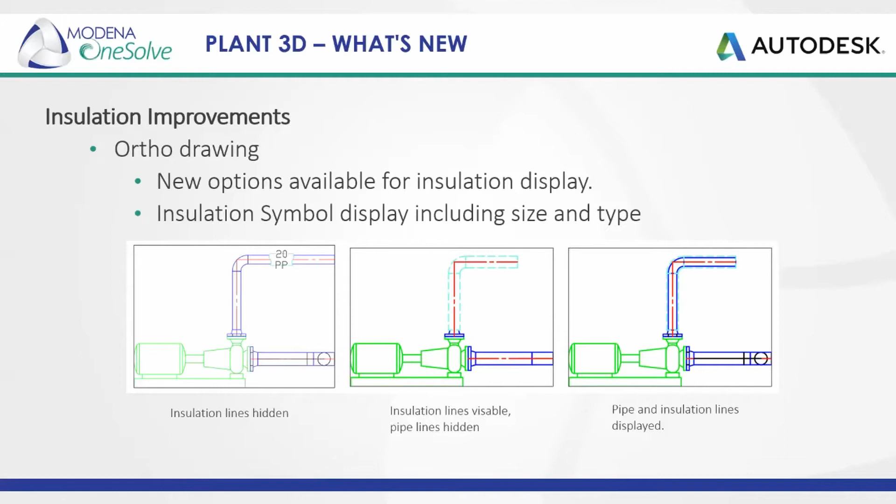Moving across to the actual improvements around the model. In terms of the 3D model and insulation, there is now transparent display of insulation. So there's no longer just this exaggerated view of your pipe. It's not like you're looking at an odd pipe size when you turn on insulation display. In 2021, that's now transparent, so we have better visual feedback as to whether insulation is being applied or not.

For users who are not utilizing Plant3D, so standard AutoCAD users, let's say, if you export your Plant3D models out to DWG, the transparent insulation will export as a 3D solid. It gets placed on a layer, and that can be toggled on or off using standard layer control in normal AutoCAD as well. So that option is there, at least for non-Plant users, if they are viewing data that's been exported from Plant 3D.

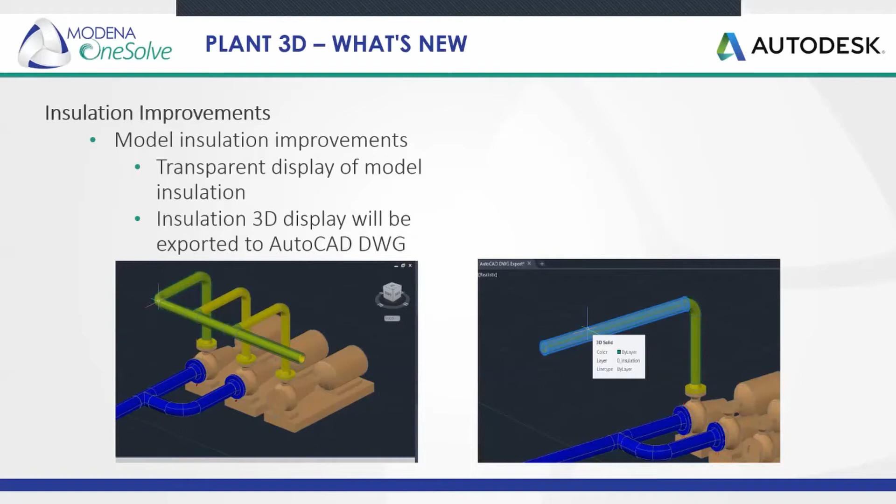Let's move on to the next portion here, which is really around collaboration. Okay, so the next portion really that's been improved was collaboration. The collaboration service is now based on the latest BIM 360 technology, making it faster and more stable. Now, aside from replacing BIM 360 Team with the document management module in BIM 360, the collaboration workflow remains the same.

BIM 360 Design is a cloud-based solution that integrates with the AutoCAD Plant 3D 2021 toolset to provide an enhanced cloud collaboration experience. So in this release, on top of that, you can now directly share a cloud-based file between AutoCAD Plant 3D and the document management module on the BIM 360 platform.

Leveraging the document management module, permission management is now available in that collaboration workflow. And with this feature, project teams and the extended stakeholders can securely collaborate and share files and data across locations and disciplines. So what I've got next up for you is a short video which highlights some of the collaboration around Plant 3D and BIM 360 Design. I'm going to start that video for you real quick.

Autodesk understands the struggles faced by plant designers and engineers when collaborating across teams and locations. That's why Autodesk created BIM 360 Design, the cloud-based collaboration solution for AEC professionals. BIM 360 Design, now with collaboration for AutoCAD Plant 3D, delivers an enhanced collaboration experience for plant designers and engineers. This allows for secure sharing of Plant 3D files and data between plant designers, engineers, and stakeholders. Plant 3D users can also share P&IDs with Revit users, providing them with a view of the overall plant design.

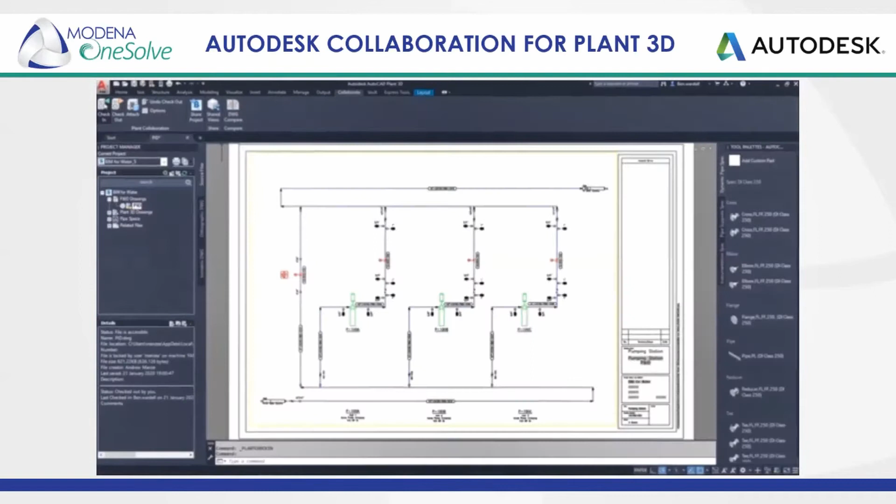Let's look at an example of how BIM 360 Design improves workflow collaboration within Plant 3D. First, the project administrator sets up the collaboration space in BIM 360 Design. The administrator then adds the project collaborators and defines the appropriate permissions before sharing the Plant 3D project to the collaboration space. The P&ID drafter will then create the P&IDs for the project. The piping designer will then create the 3D piping models using the P&ID as guidance. Drafters will then generate the necessary ortho and ISO drawings from the 3D model, including documentation such as bills of materials.

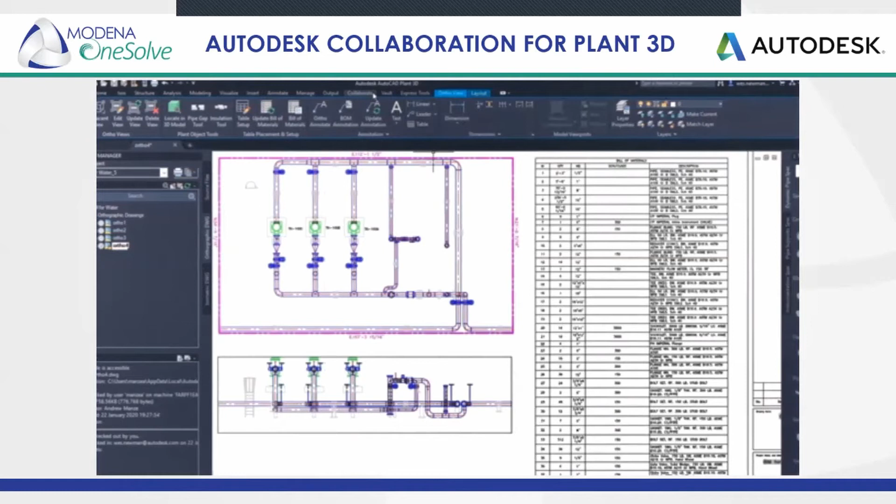All Plant 3D project DWGs from P&ID to 3D piping model to ortho or ISO are all automatically visible in BIM 360 Design when working in a collaboration project. The project manager can check the progress of the project at any stage and assign tasks as part of the review process. With Autodesk collaboration for Plant 3D and BIM 360 Design, users can manage permissions, share data easily and securely, and get more out of the software they already love.

Fantastic. Okay, so that was just a short video clip on that integration between BIM 360 Design and Plant 3D. Like I say, I think it's fantastic, and for me it's one of the greatest things to come out of the plant stable in a while.

So moving on into the process structural workflow. For the purpose of this workflow explanation, we'll be creating the conceptual spatial representation structure inside of Plant 3D. Then using Advance Steel, we'll import the Plant 3D structure, configure and set up any steel profile mapping if there are steel members that are not currently residing in the Advance Steel library. The Advance Steel drawing will then be copied back to the Plant 3D project and referenced where required using standard XREF functionality or features.

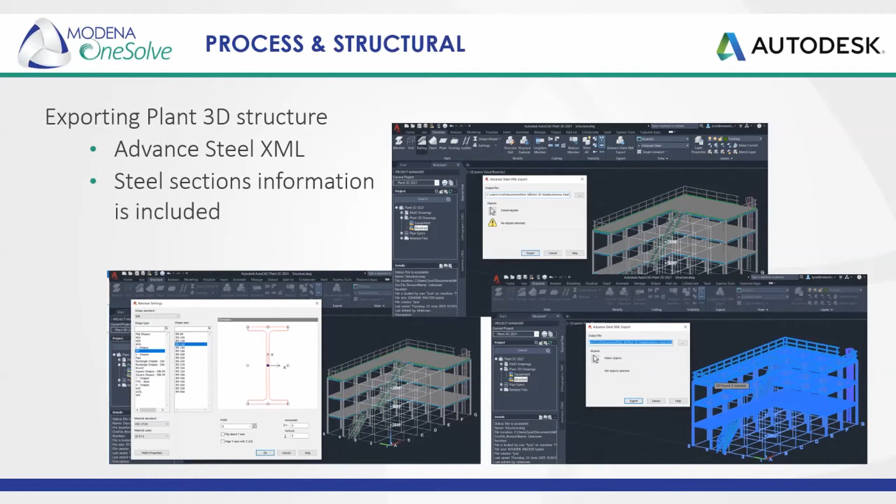From there, that file would then need to be imported back to Advance Steel. Now, importing the Advance Steel XML is a fairly straightforward process. During the import, Advance Steel will convert the steel members based on the Advance Steel library. Now, if no mapping exists, and just to highlight the mapping here, when I'm bringing something in from Plant 3D, let's say I've got an IPE 200 that was exported, inside Advance Steel when I import that, if an IPE 200 doesn't exist, then it needs to either be created, the actual profile, or perhaps just mapped to a similar profile that might be suitable in that condition.

Now, when we create that mapping, it's a one-off. We won't have to redo it, and that mapping information is stored. Okay, just on that as well, when the information is imported into Advance Steel, you will find that a lot of the plant information translates, and that way we can leverage what's already been done on that conceptual model file.

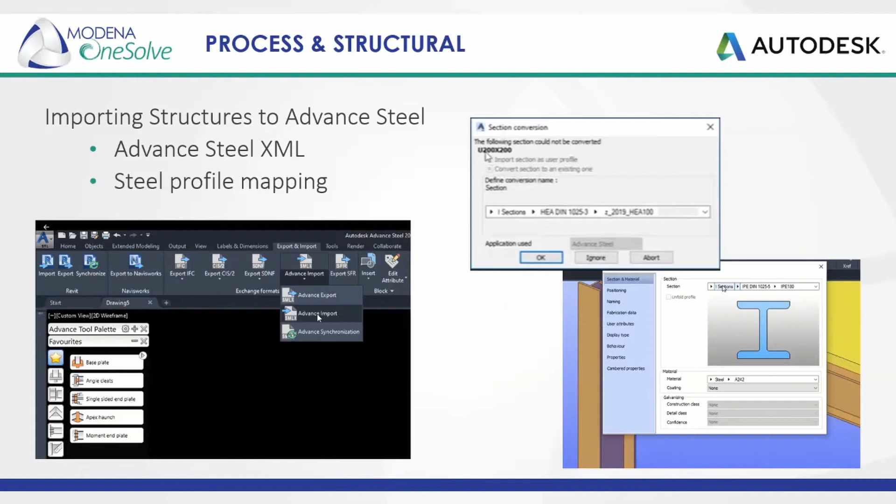To then leverage the Advance Steel file in Plant 3D, this is now when we're going back. So maybe just before we touch on Plant again, on Advance Steel, once that data has come into Advance Steel, that file behaves just like an Advance Steel drawing, and the structural team can edit and manipulate that data as they would an ordinary Advance Steel DWG file.

Going back towards Plant 3D, for Plant 3D to now leverage that Advance Steel file, typically what we would do is copy the drawing, this being the Advance Steel drawing, to our Plant project, and then we use that Xref functionality to reference that structural design within the Plant project. The Advance Steel users going forward will then access the structural file within our Plant project location to continue any structural work. Obviously, any changes made to the structural file will reflect throughout the Plant project wherever that structural file is being referenced.

Something to note here, which is very important, it's actually imperative. If you are going to be leveraging your Advance Steel information inside Plant 3D, it is imperative that you download and install the Advance Steel Object Enabler. This will enable the display of those Advance Steel graphics, as well as the metadata from Advance Steel, making that visible within Plant 3D as well.

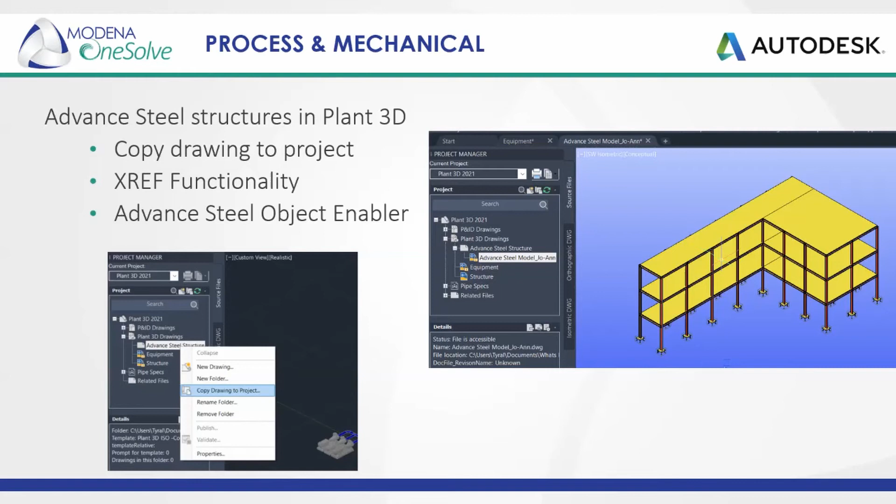So we've actually got two little video snippets that we've created. It was done by myself and Jo-Ann. The first one is one that Jo-Ann created, going through this process, how we would bring that information into Advance Steel and how we would take it out of Advance Steel and then leverage that information once again inside of Plant 3D.

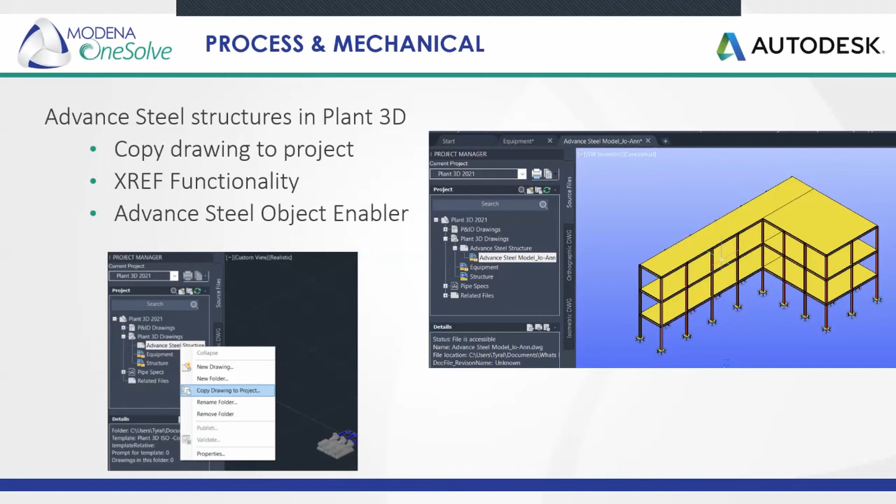Let's have a look at that first video clip on how we bring the Plant 3D information into Advance Steel. This video should start playing. So like I've mentioned, this video Jo-Ann actually recorded for us. It illustrates the process that one would follow in order to leverage that spatial or conceptual structure from Plant in Advance Steel.

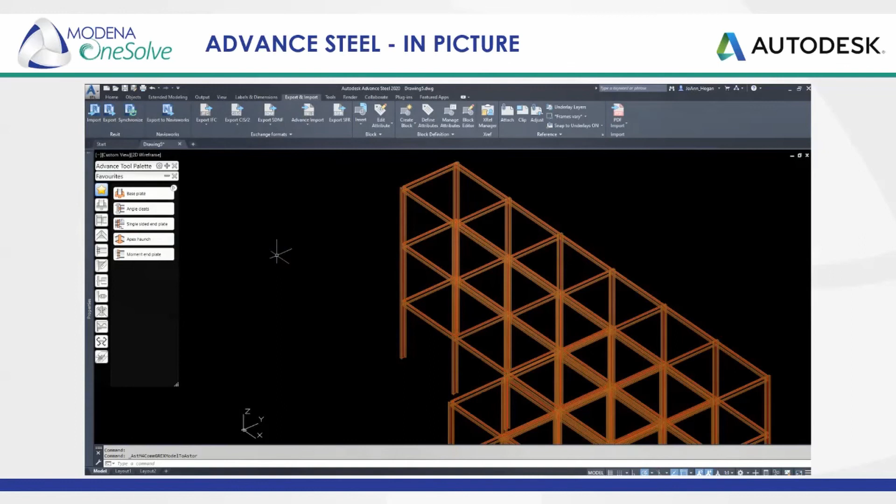So the Advance Steel XML would be imported. In this particular case, when Jo-Ann imported that XML that we gave her from Plant 3D, there was no mapping required on those steel profiles. There you can see how that structure has come through from Plant 3D. You'll find that the information does translate from Plant to Advance Steel, including the steel profiles.

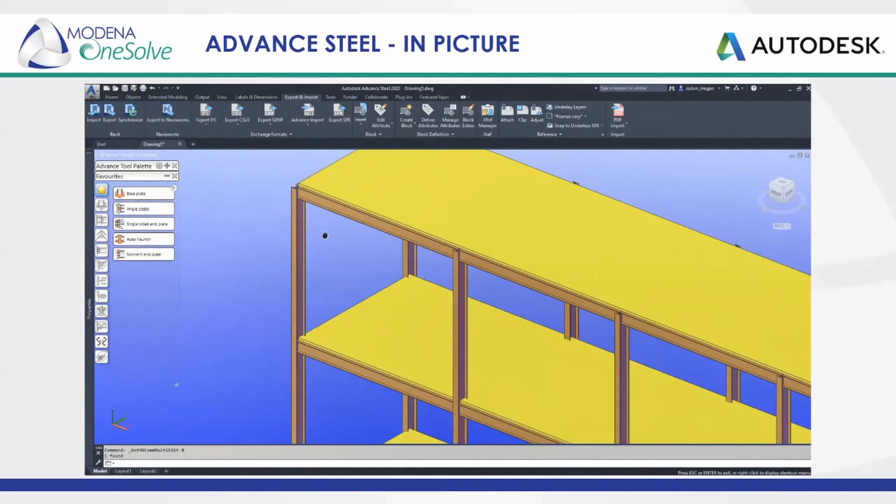You even have the justification and offset options coming through as well. From here, the structural team would continue with detailing or modification on the model. In this case, Jo-Ann just placed a couple of base plates down for us so we could see an update on the plant side. So let her populate those through quick, and you should see those go through.

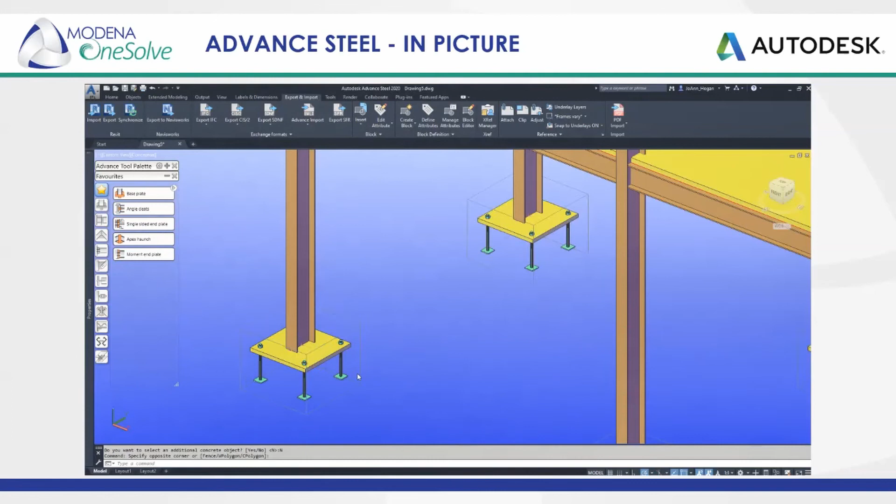From here, this file would just be saved ordinarily, and we would then copy that file into our plant project, which would really be the next step. I'll wait for this to finish playing through. I see that it has propagated. That's fantastic. Joe will then save that video for us, and then we'll have a look at how we can now leverage the structure inside Plant 3D.

Moving over to Plant 3D, in order to now leverage that structural file, we will use standard XREF functionality. In this particular case, to keep all the files visible and in line with our processes, what we've done is we've copied the Advance Steel file into our plant project.

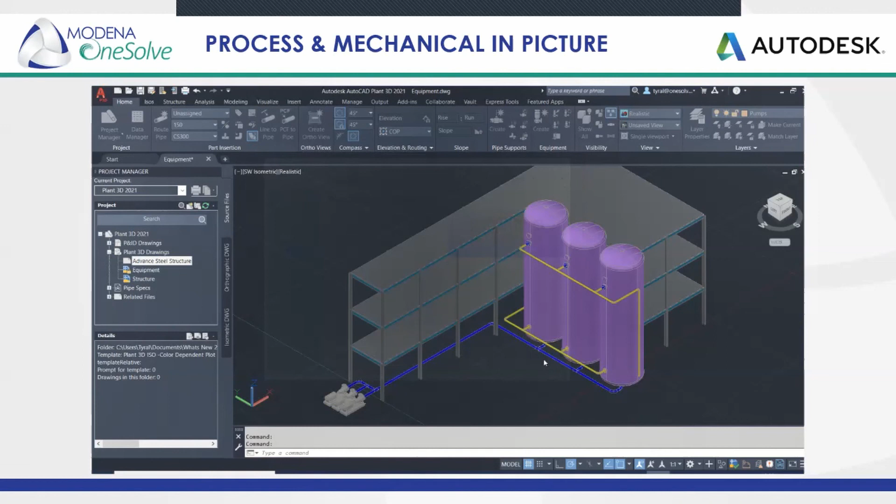I'm going to go ahead and start this video as well, just so you can see how that works, how I've copied that file in. Now, when we bring this data into Plant 3D, it is imperative that you have the object enabler installed so that it's visible.

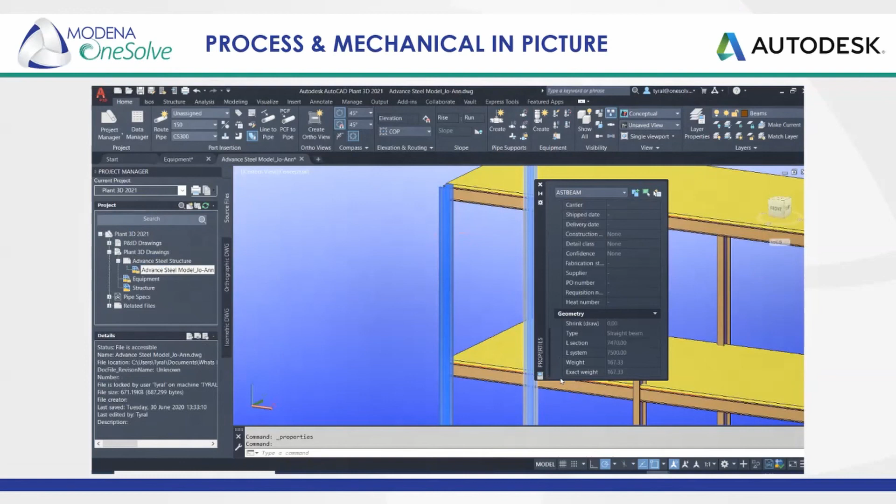There you'll see how Plant displays that Advance Steel model that's come from Advance Steel. It's been copied into the project. Here you'll also notice how the property information and metadata from Advance Steel is also translated back to Plant 3D as well. Now, once we've verified that the structural model from Advance Steel is correct and loading up correctly...

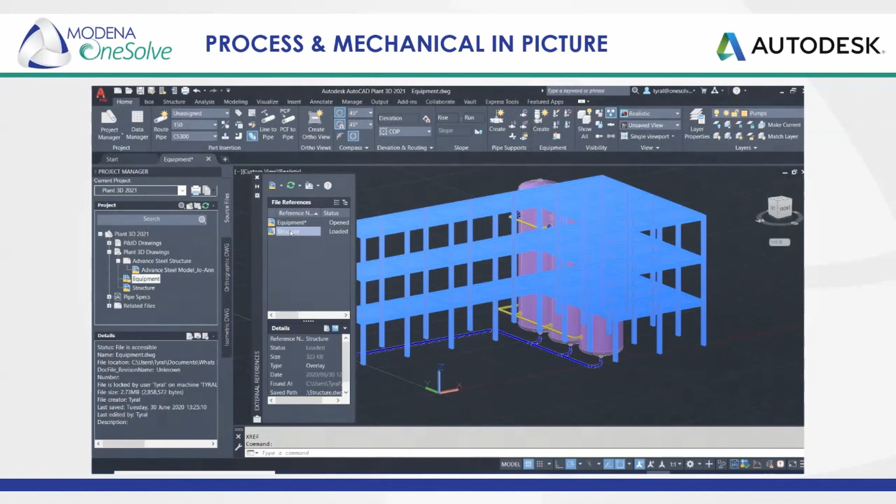We'll then actually go and swap out the conceptual file that was originally exported. So over here, you'll see the original file that was exported, the structure that was created inside Plant 3D. Then just utilizing that standard XREF functionality, we would go and detach the one and then go and attach the Advance Steel file.

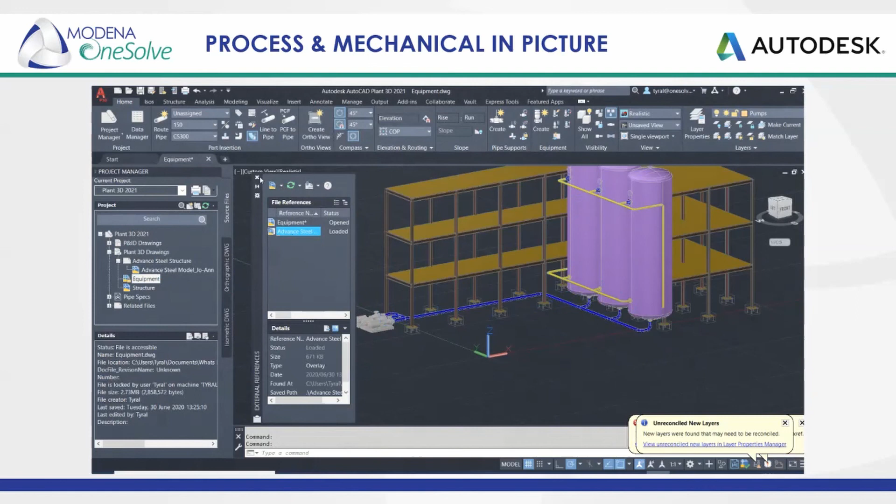Now, any changes that are made to this Advance Steel file by the structural team will obviously be reflected throughout. The only important thing here is that going forward, the structural team would need to reference or at least utilize the Advance Steel file that is now residing within the plant project. So that's really it on that workflow, how one would collaborate with structure from process, or vice versa. As we can see, it is a fairly straightforward process.